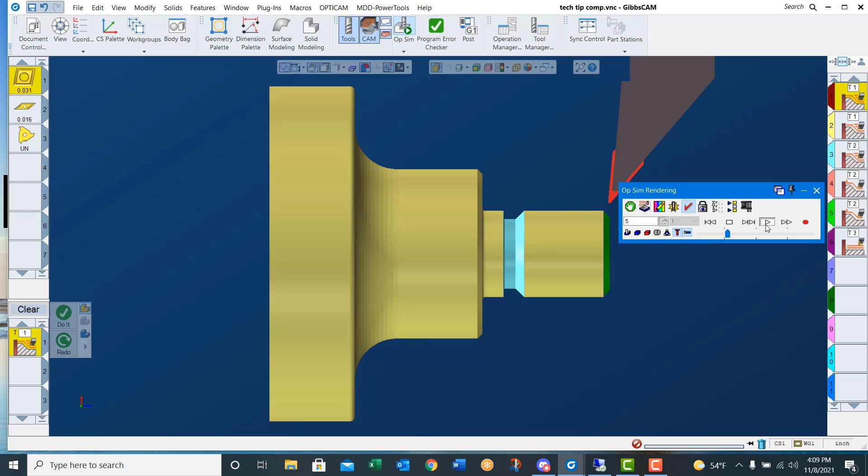In this demonstration, we will create and save processes and we will use them to program a simple turned part. I've arranged my processes by operation type. There are no limits as to how you arrange your list. You may choose to arrange them by tool number or any other criteria that works for your programming.

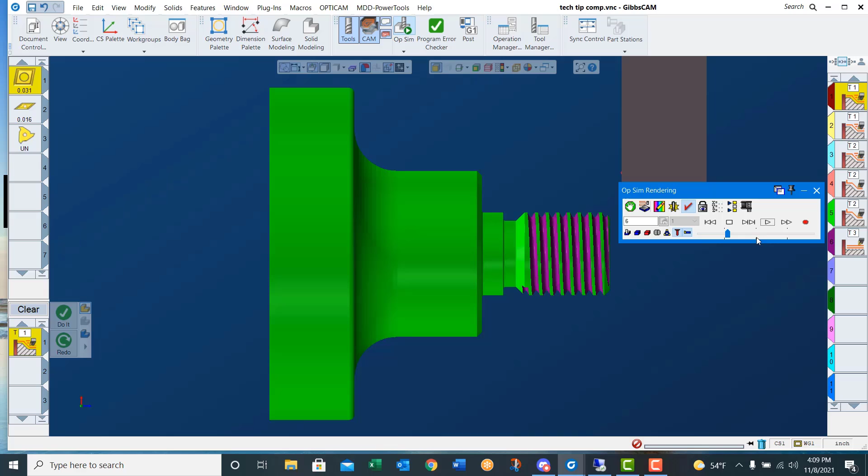Let's stop this simulation and we will take a look at my process list that I created on my desktop. You can see that I've got lathe, turning, OD, 80 degree, rough. There is no face process in here. I've purposely deleted it so that we can build it right now. So let's open up the project we were just simulating. You can see I've got the 80 degree tool here built.

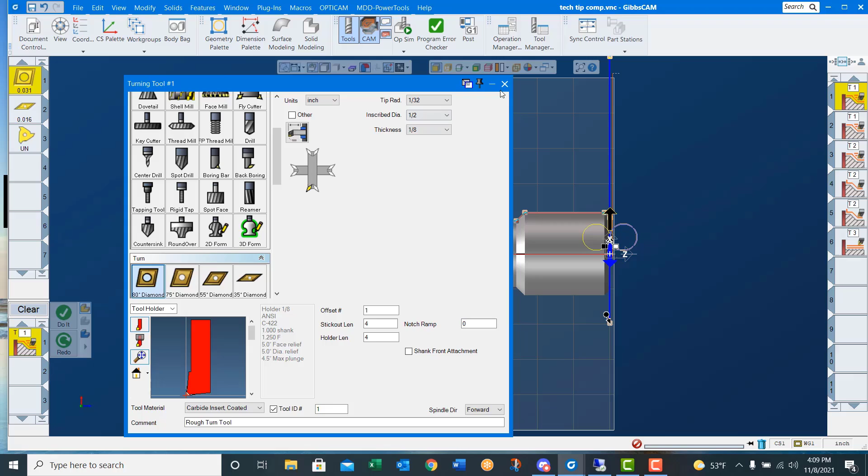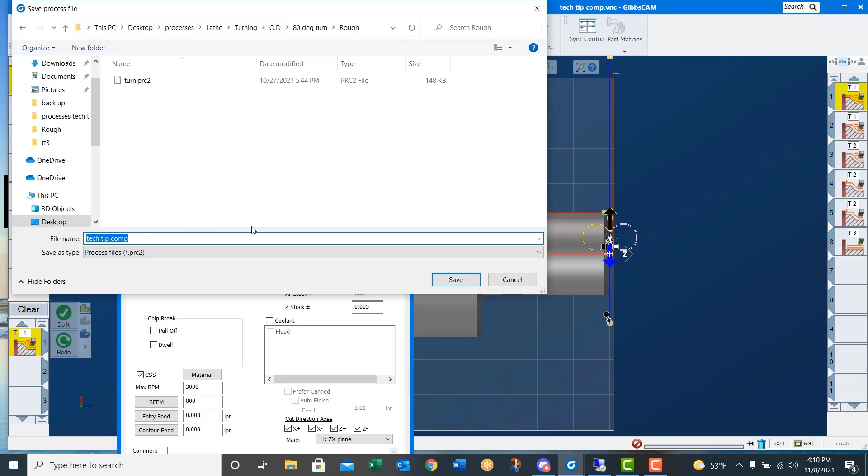Here's my rough face. Once you've done the process, you can then save it as a process into a list. So I just activated it. I'm going to right click. I'll say Save Process List. We navigate to that folder I was just looking at, lathe, turning, OD, 80 degree, rough. You see I got a turn. We'll now put a rough face process in there. Face, enter, and we just saved it.

Now let's look at using all of these processes to turn this part. First thing you need to do is set the folder. That tells GibbsCAM where to go looking for our processes. In this case, it's on the desktop processes, and all I have to do is hit select folder. Now when I right click and say load process, lathe, turning, OD, 80 degree turn, rough, face. You see it built the tool, it built the process.

All I need to do is set my markers and choose the correct direction of travel, and we should have the part rough faced. Say do it. There we go. I used material only, so I don't need to be very careful about my marker placement.

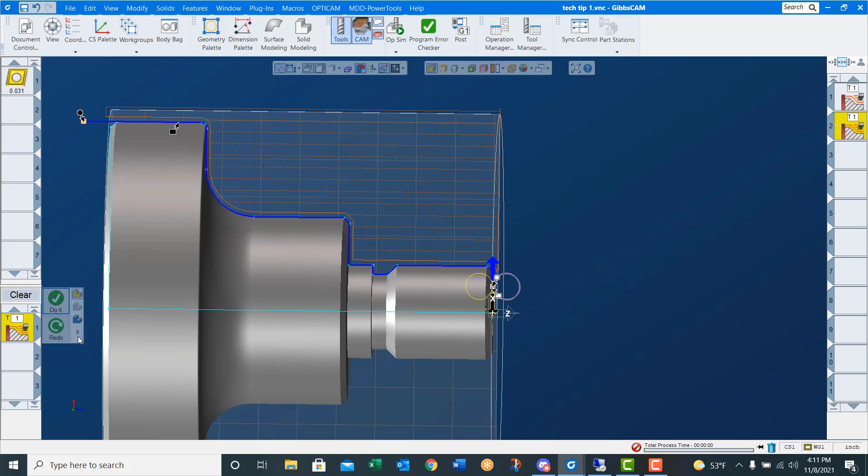We'll go right click, load, lathe, turning, OD, 80 degree rough, and turn. Now I need to set my markers appropriately again. We'll move our end feature down here, move the end point off of the part, and we'll say do it. I did not dive down into this thread relief area because when I saved that process, I purposely had no X minus checked. So we'll go lathe, turning, OD, 35 degree.

We're going to rough that thread relief out now. I also saved a process for that. You see it just built the 35 degree tool. We'll set our markers appropriately using material only again and say do it, and it roughs out the thread relief for us. Now we'll right click, load list, lathe, turning, OD, 35 degree, finish, face.

Choose the end face. Make sure to move our markers where they need to be. Choose the direction of travel, correct side of the line, say do it. And we just finish faced the part.

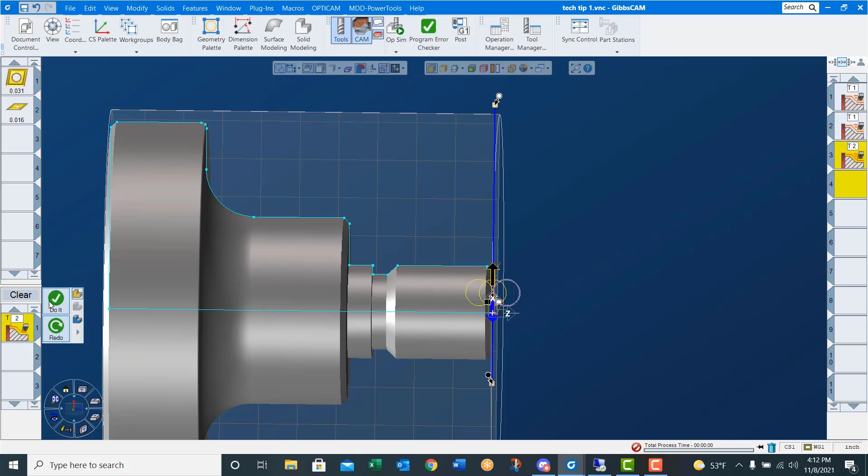We'll right click, load process, lathe, turning, OD, 35 degree, finish, turn. Once again, we need to set our markers. That's all we need to do. Make sure to choose the correct direction of travel, correct side of the line, say do it, and it turns the part. You can see here I had no drag selected when I saved that process.

We've got one thing left to do here, and that's just to thread this part on the end. So threading, OD thread, imperial, 1" 8, and when I say do it, it builds the tool, it threads the part based on the criteria I saved when I saved the process.

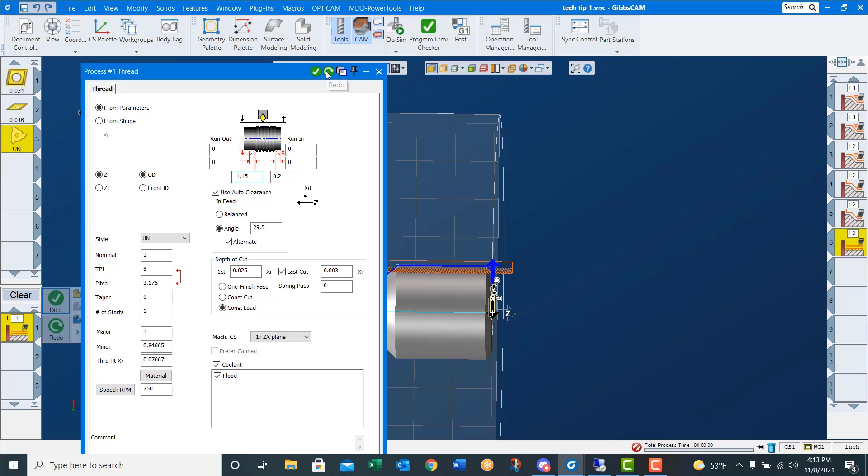So if we think that's a little too long, all we have to do is open the process up. Now instead of going -1.200, let's go -1.150 and say redo. Now when we look, we went 1.150 instead of 1.200.

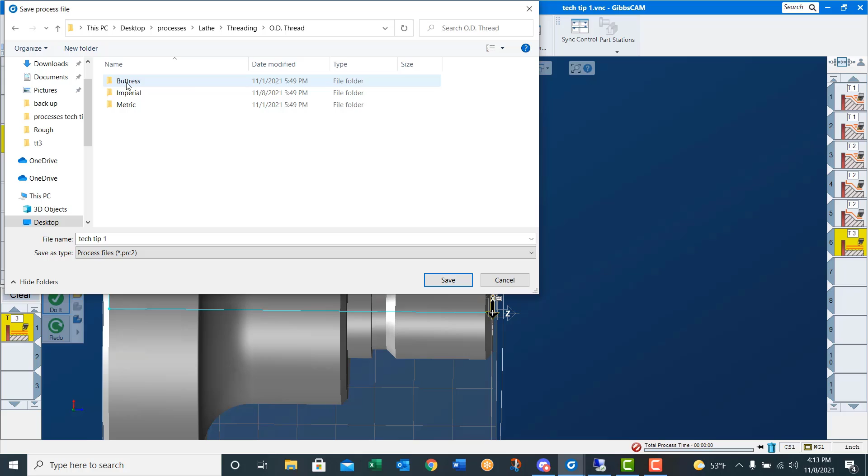Now if we want to overwrite our existing process, we've got the tool, we've got the process called up. We go right click, save process, drive into our process tree that we created. There's that 1" 8 thread. If I just single click on it and say save, it asks me if I want to replace it. Yes, I do. Now that process has been saved with the new depth of cut.

Processes reduce the amount of time needed for programming in GibbsCAM.